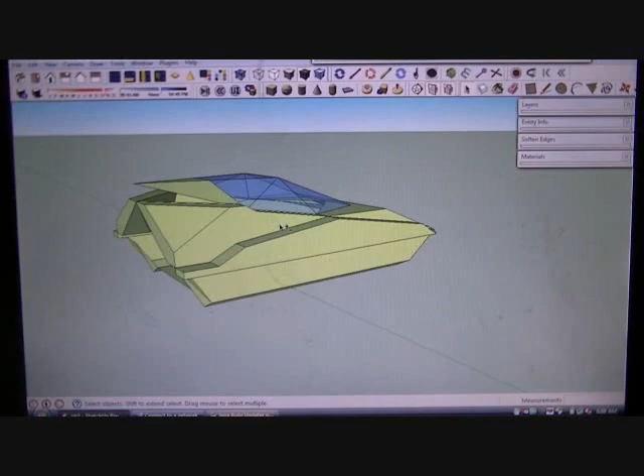Basically what I'm about to do now is take you through the whole design phase and show you how I got to the final design. As you seen in the last video, this is what I started off with, and it was late at night. I was just putting polygons together, and that was like the overall shape I wanted.

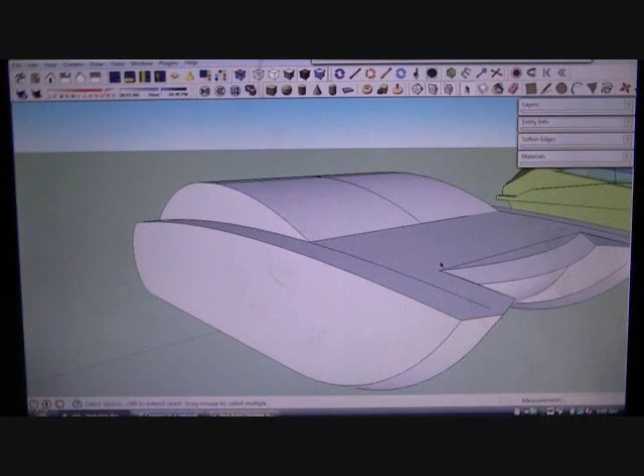Simplified it down to this right here, which is a pretty basic shape. I ran across this one right here in the warehouse that they have in the components. So basically I cheated a little bit, 75% close to the style I wanted, but it was way too many curves for me to even attempt to do anything with.

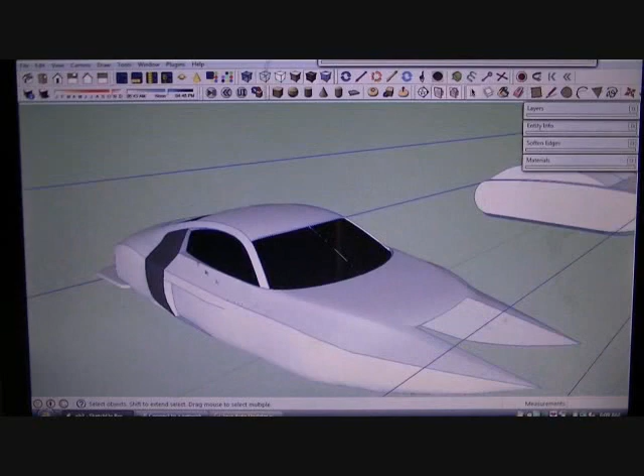So I took that, like I mentioned in the last video, and simplified it down to basic shapes that I could cut out myself, and fiberglass, Bondo, nails, screwed together. And from that, ended up with this one right here.

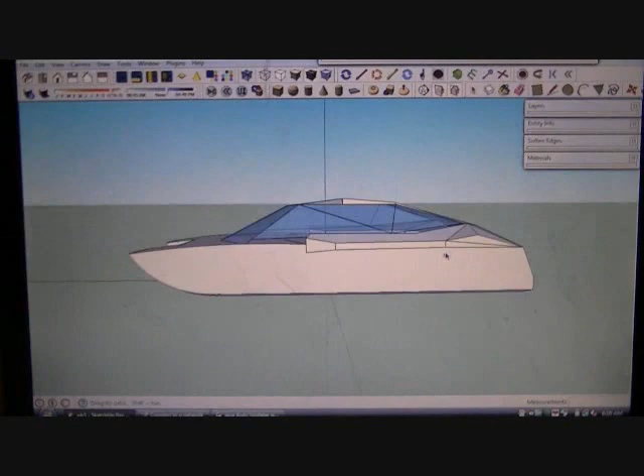So this is how the final boat will look, just like this. At first I wanted to keep it confined to where it could fit in the back of my truck, but I said to hell with it. I wanted more space. I didn't want to cram everything into a 5x6.

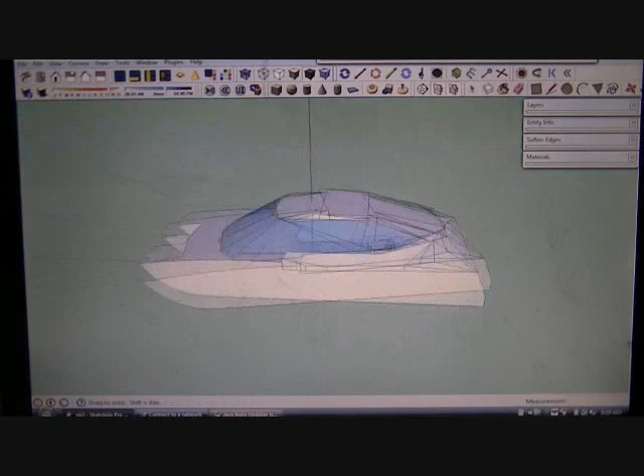So what I did was I made it to where it still fit in my truck as far as left or right, but long ways. Right now it's 11 feet, so I might need to invest in a trailer of some sort. But enough of me yapping about that. Let me show you the inside of this bad boy.

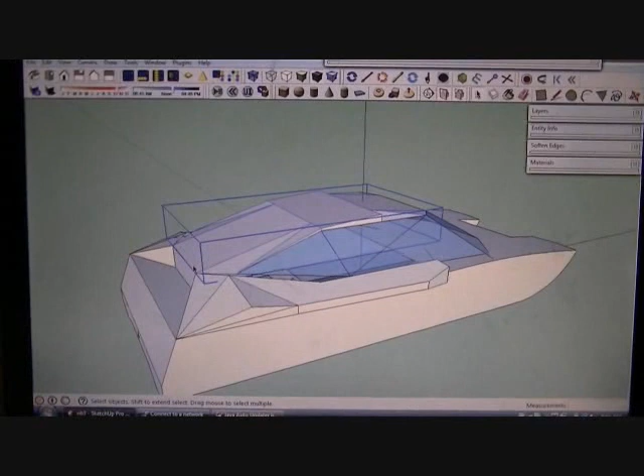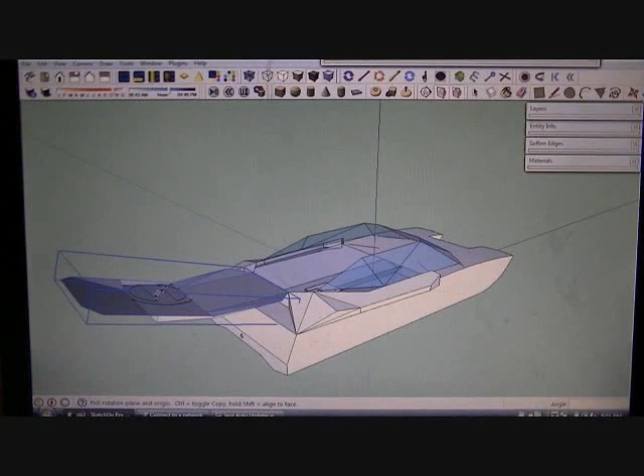I also wanted to make it to where if I'm pulling up into like a dock, whatever, I could basically take the canopy, which is right here, and open it back and use this as a step to step into the boat. You feel me? So that's an idea.

But as far as the canopy and the windows, well the plexiglass that I'm going to use for the windows, as far as those two, that's just gonna be after I finalize the base of the boat, which is this right here.

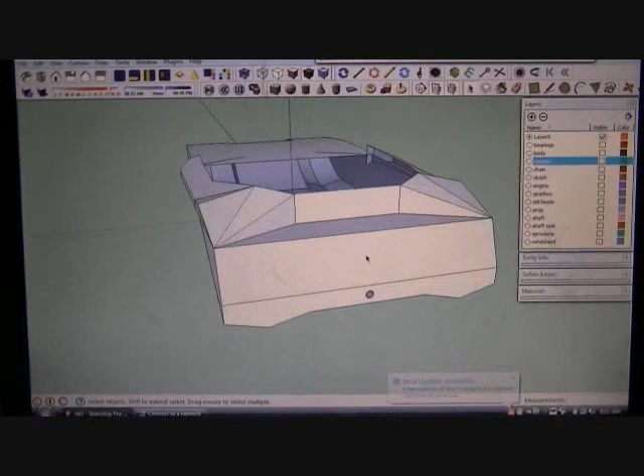This is what I'm gonna make first, same as I did last time. Since I'm gonna have a different propulsion system than last time, an inboard rather than outboard, I got a big hole right here, so I have to make sure that water doesn't get into here.

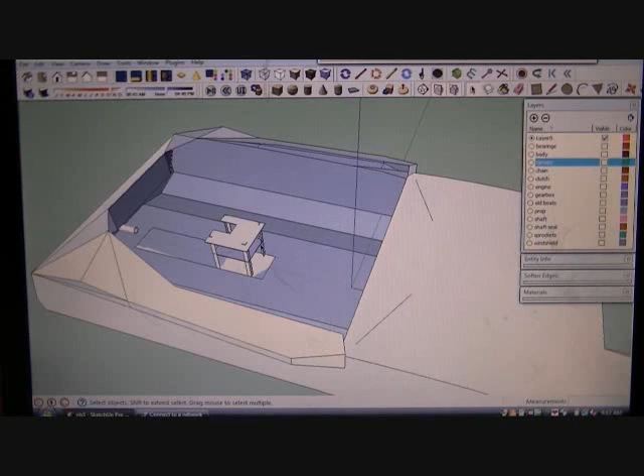So what I'm gonna have to do is make like a compartment to where if it does leak, I could just seal this off and it won't sink me. I'm not worried about the boat... well, I am worried about the boat, but you have to have a propeller, of course.

And can't have that without a shaft, right? 1-inch shaft. Already ordered the shaft, still haven't ordered the propeller. I'm gonna go to a local marine boat shop or whatever to get the propeller, because I don't know which way the gearbox is going to fit. You'll see what I'm talking about.

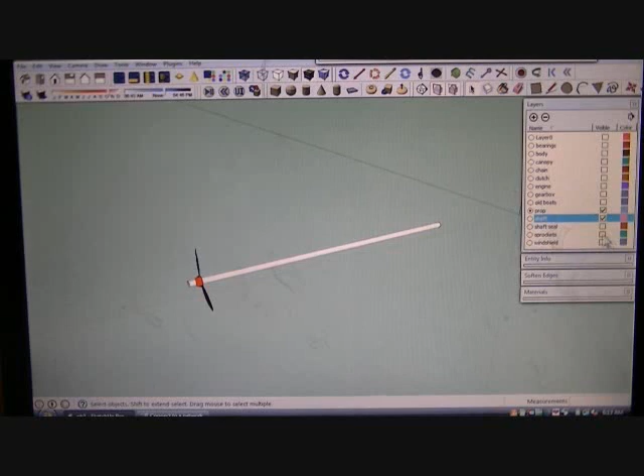Anyway, but yeah, after that, what else do we need? You guessed it, sprockets. We got a few sprockets into place, 3/4 sprockets up here, 1-inch sprocket for the 1-inch shaft, and we're also gonna need some bearings, right? Some pillow block bearings. We're gonna need some chains. So I thought I had another chain right here.

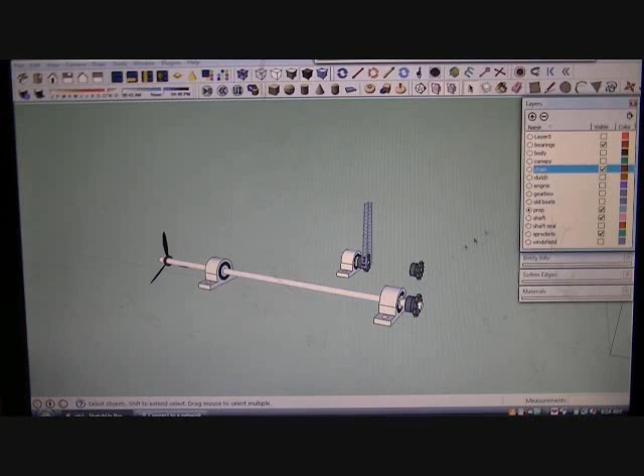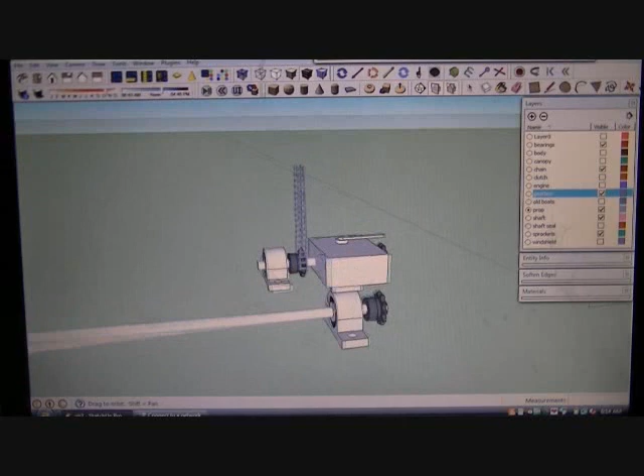Anyway, but I wanted to do something different and more challenging with this boat. So I decided to insert a gearbox, which is right here, basically forward, neutral, and reverse. I haven't used one of these yet. I only found one company that even sells them - Comet, the people that makes the little centrifugal clutches as well.

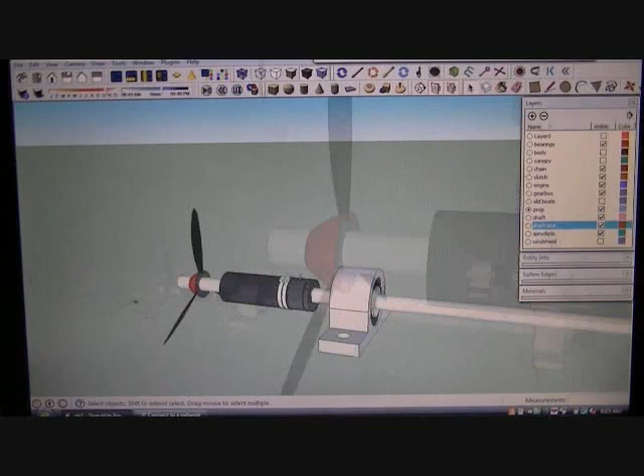Yeah, that's the only place where I was able to even find a gearbox. So I thought that would be pretty cool. And of course you got the clutch and the engine, a shaft seal. A shaft seal is basically - let me show you how this is gonna work - this basically keeps water from entering the boat.

Turn this back on. Yeah, so we're inside the boat now. As you can see, this is the back part right here, which is going out to the shaft, to the propeller. And this basically seals.

Well, I need to place some more hose clamps. There are going to be more hose clamps, another set of hose clamps back here. So yeah, that's how that works.

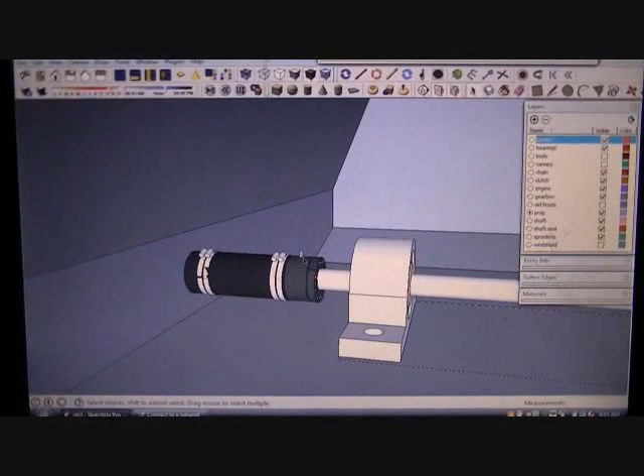And this is basically how everything is going to work, just like this. And this is basically a stand to support everything. So let me see if I can get a good view.

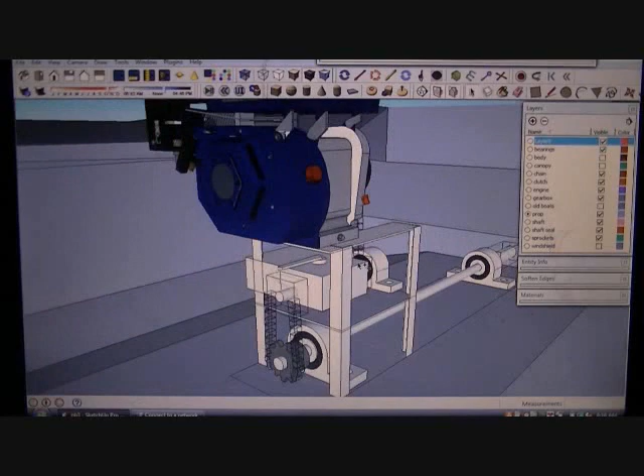Alright, there we go. We got our shaft, which is right here. Let's see if you can see it at the bottom. And which is going to be turned by this sprocket up to this chain right here.

And this is the gearbox, forward and reverse. The forward is 1-to-1, reverse is 2.7-to-1. But the thing is, I don't know which direction is that.

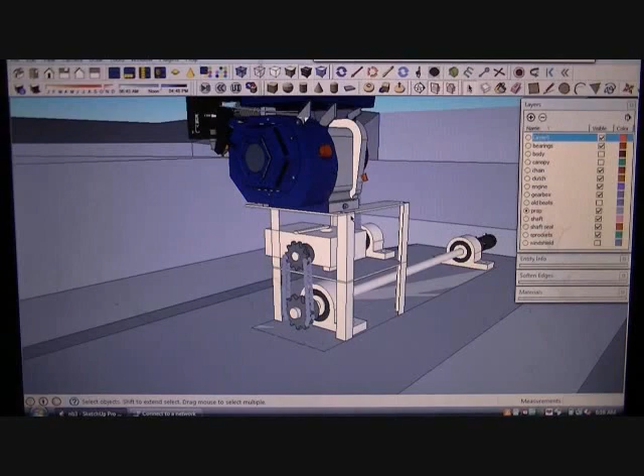So as far as the dimensions of the mounting plate for the motor up here, I have to wait until I get the gearbox in to figure out which rotation is reverse, which rotation is forward, so I could flip the engine, because as you all know, the engines rotate counterclockwise, that's from back here.

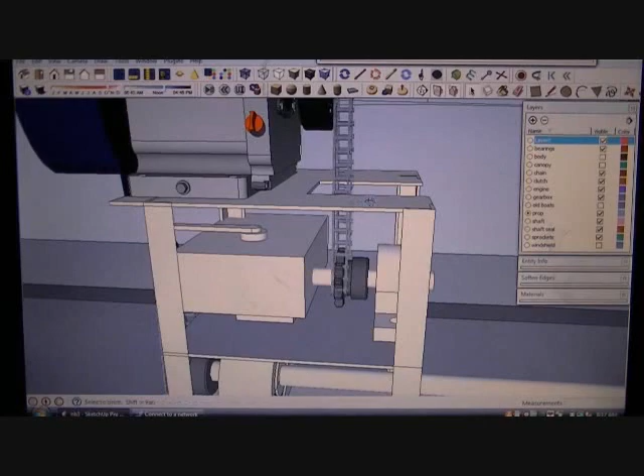But yeah, you get the picture, you know. So far it seems like everything is gonna work out.

Okay, let me put the windshield on there and the canopy. Oh, and me.

This is like a little example of how you would sit in there. You're gonna have about 2.5 feet of space from the bottom of the boat, from where your butt is, to the top of your head.

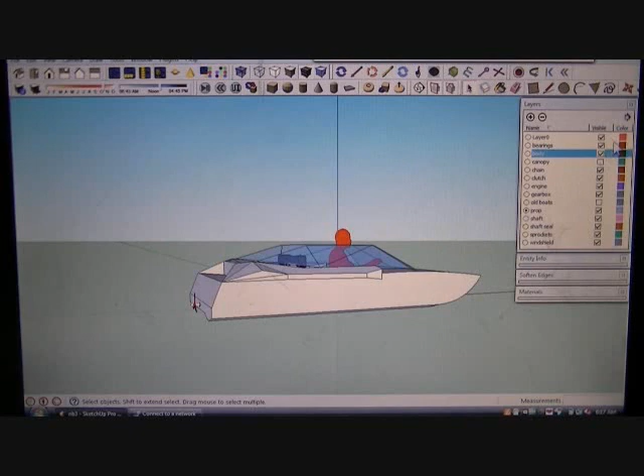So hopefully that's enough. If not, I'll just cut the canopy off, put the canopy back on there, and do X-ray. So yeah, this is what we have.

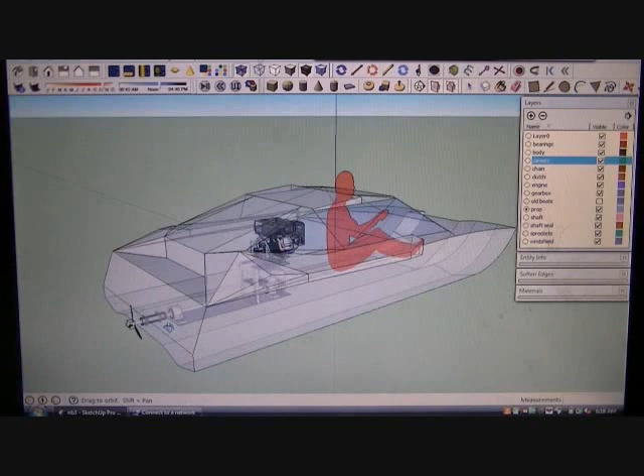And one more thing that I forgot to put in here was the steering. I don't want to rotate the whole engine, all of this, in order to do so. So I'm like 99% sure that I'm going to use a rudder at the back.

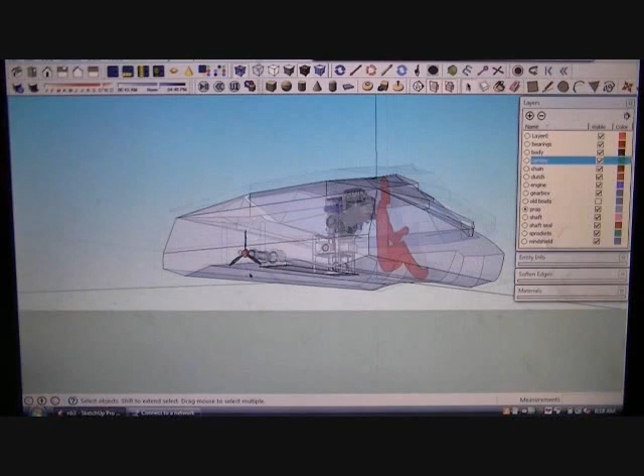And I'm thinking about incorporating something to protect this propeller, like a guide or something of some sort, so it won't mess it up, right here. Probably gonna start doing that next week.

Let's see if my girlfriend lets me.

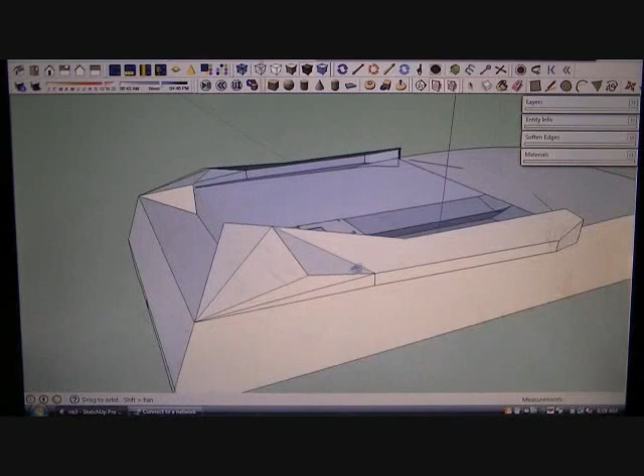Now, I still got some figuring out to do. All this right here, this is just basically for decoration, just to make it look cool. I might not go through it, you know. All depends on how I feel and if it's too big of a challenge.

But yeah, I think it's simple enough. Although it's a little bit more complex than the last one, I still think we could pull it off. But enough of me yapping.